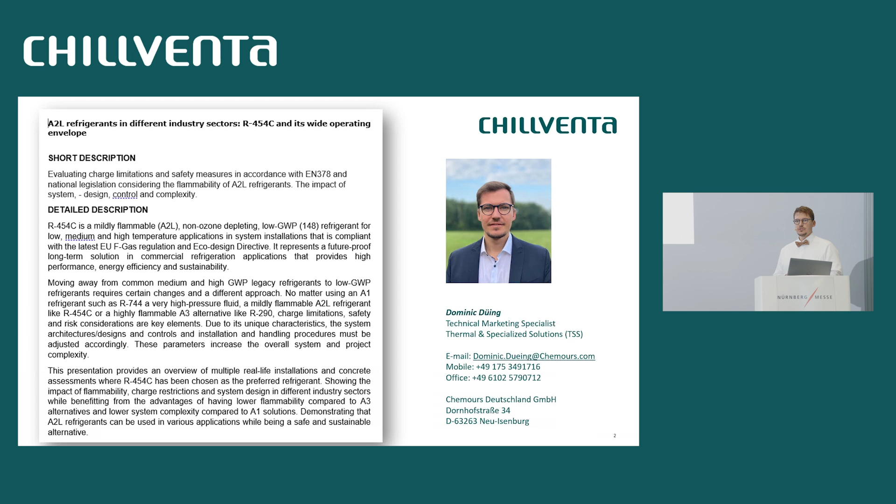Next will be an overview about low GWP solutions dedicated to the limits placed into the F-gas regulation, and then I'll have some technical comparison based on some RefProp calculations, and then we'll show you some real life case studies, implementation of systems into different applications and in different sectors. Then we'll have a small conclusion and an outlook about higher efficiency of the refrigerant 454C and how we as Chemours can support you in achieving that.

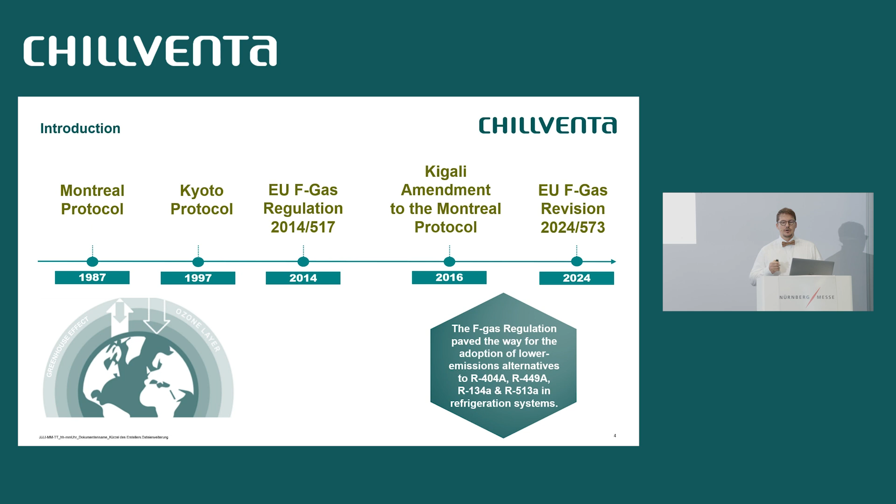So I don't want to go too much into details here. I think all of us will roughly know the path of the last, let's say, 50 years. So currently we're in 2024. In March the new F-gas regulation came into place, and with that we have new limitations and considerable bans for some refrigerants. And here's the, let's say, broad overview.

So for different sectors, starting with air conditioning and heat pump, there's the GWP limits, which you see on top of it. So we have 150 GWP limit for air conditioning and heat pump applications above 12 kilowatt. And here you can see that 454C fits in there, as I will show you later. Next point is commercial refrigeration. Also here we see a GWP limit of 150. And there's another one dedicated to chillers above 12 kilowatt. There we're talking about 750 GWP limit.

And there's our solution from Chemours, R-454B. But as already mentioned, today I will focus my presentation on R-454C, dedicated to AC heat pump and also refrigeration applications.

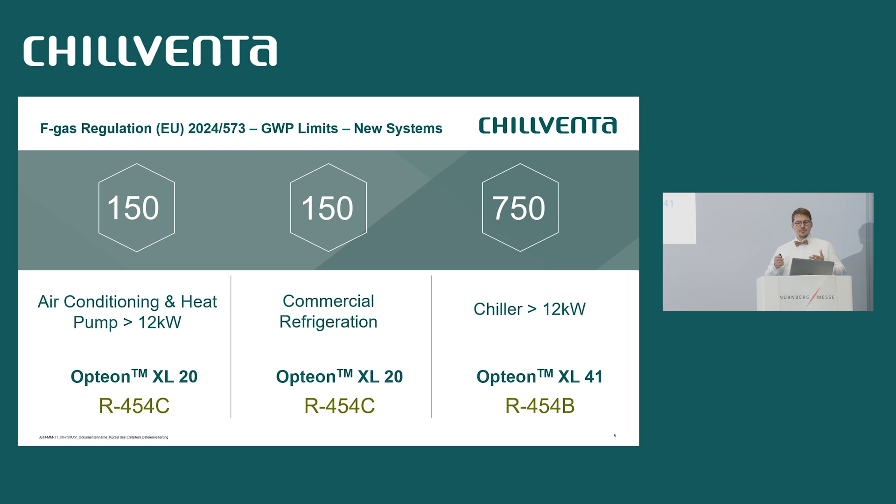So, considering the GWP limitations, I've made a small overview of refrigerants which have been used very often in the industry, especially in commercial refrigeration in that case. So on top, we have 454C. It's an A2L refrigerant. We have propane as an A3, so a hydrocarbon, and we have CO2, R744. Very important here, and the pointer doesn't work anyway.

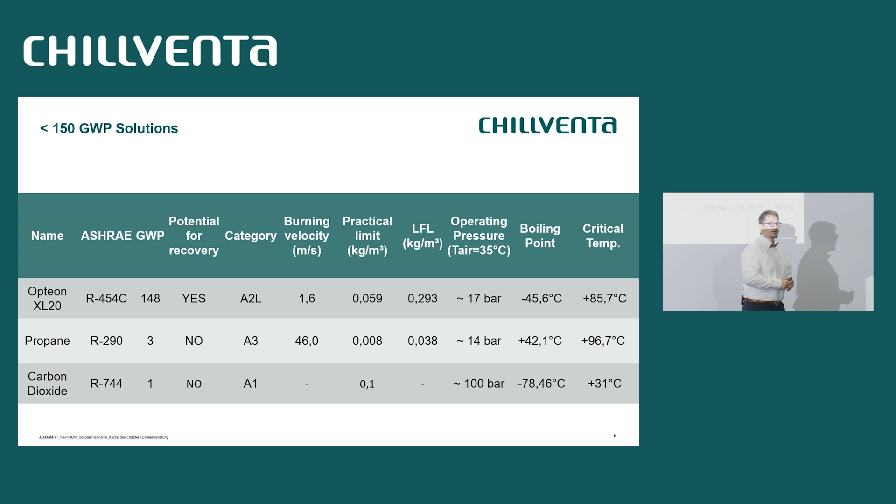So the potential for recovery. It's a big topic also for us, for Chemours, with the F-gas regulation, quota drops, etc., and also the whole circularity of equipment, refrigerant, etc., supplying the value chain. Very important, the potential for recovery for all F-gases especially, considering also other refrigerants such as 449A, 513A, whatever. So it's a very important topic.

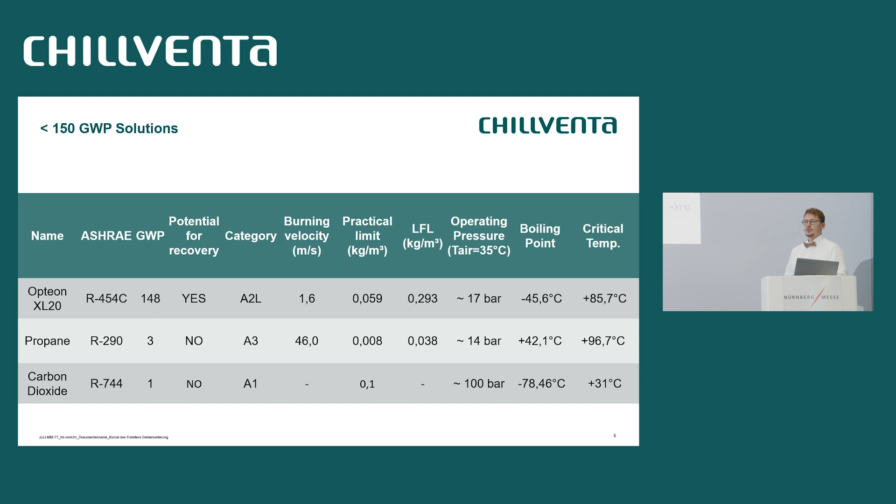Refrigerants should be recovered, recycled, reclaimed, and brought back into the system again, so that we have a circular economy at this point, supporting the whole value chain. Further right, you see some technical comparison, a little bit like practical limitation, which is obviously valid for flammable refrigerants, so in this case R-454C and propane, and some further technical information.

Next, some characteristics, and this is a very important topic nowadays if we consider the PED fluid group. So there's a difference for A1, A2L, and A3 in the PED fluid group. Considering this, when building a system, the component classification itself is important, as well as the system classification in the end. For that, we need to make sure we have the right components used in the system using A2L refrigerants, and that we have all the certifications for the components and also for the complete system. The component classification itself is also in accordance with the PED fluid group.

It's a little different for the service equipment compared to using an A1 refrigerant. With A2L, the mechanical tools are exactly the same. We just need to look a little bit at the electrical equipment, especially the service equipment, considering again the different PED fluid group, flammable refrigerant, so we need to take care of that. Same as propane, in some cases you need anti-static tools to make sure you're on the safe side when handling those tools and the refrigerant.

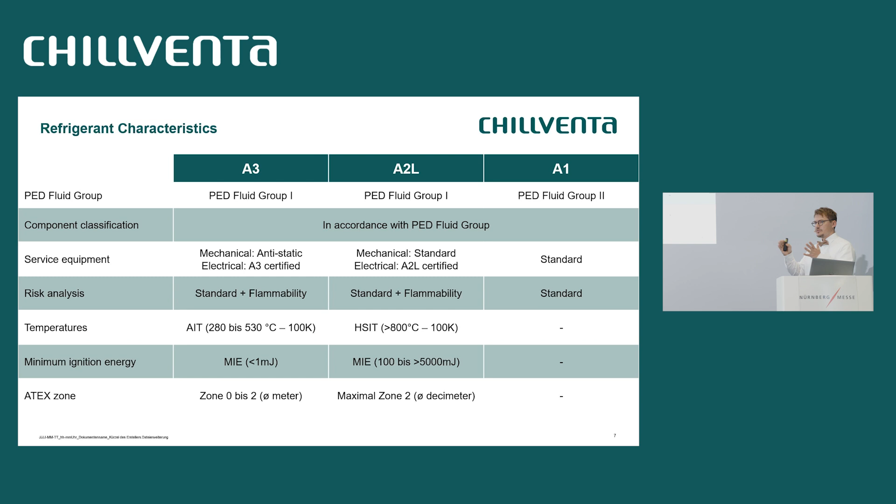Considering the refrigerants' flammability, pressures, etc., we have different regulations in Europe, but all over the world as well, of course. For example, in Europe we have the EN 378, and kind of the counterpart on the international level is the ISO 5149, and we have the 2-89 for cabinets, for example, and the 2-40 for heat pumps.

I already mentioned it, but there is the risk from the refrigerant itself, and it has to be considered. No matter what the refrigerant is, we have to make a risk assessment, which is part of the risk analysis. So the first step is to analyze the risk of the overall system, and then we have to evaluate the risk, and overall this is called the risk assessment.

And obviously safety. We have different kinds of refrigerants. Now with A2Ls, we have the flammability. Is it an issue? Well, this also depends. There are things we can do for it. We can support customers. In the regulations, we find the right way of doing it. They guide us through what we have to do to make the system, but also the surroundings, the whole area where the system is installed, safe.

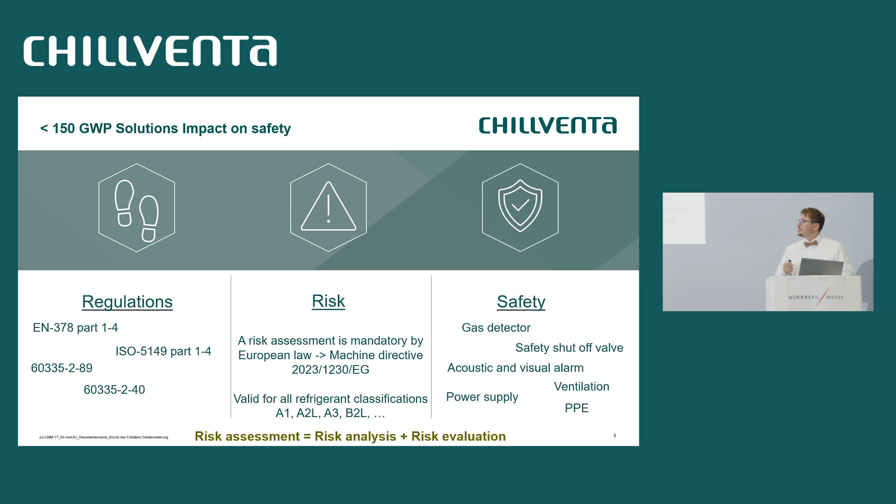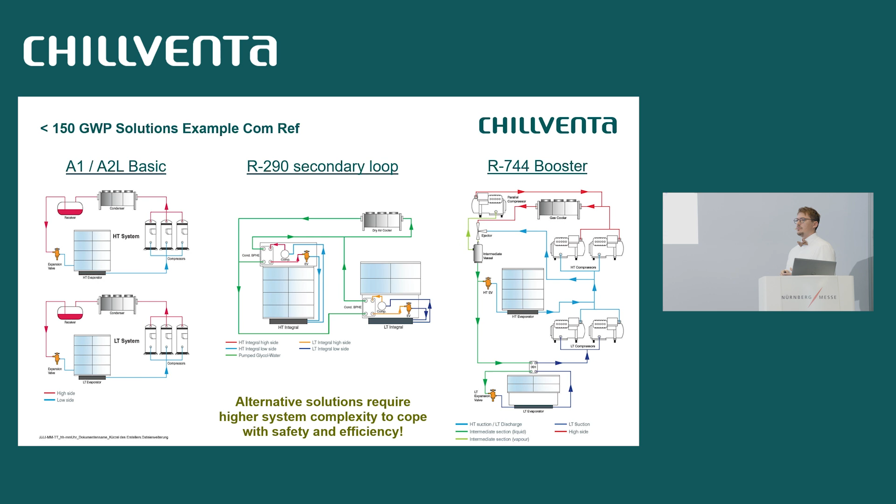While using an A1 or A2L refrigerant, it's a very similar, very simplified system. But even here, and this is something I will show you in the end, there are ways to further improve the efficiency of F-gas systems.

So this is just an example. It's theoretical information based on RefProp 10, as mentioned there, just to compare some legacy refrigerants with new A2L refrigerants such as R-454C, and we definitely see there's a way lower GWP compared to other refrigerants or solutions which were used very much in the past and which still are.

Yeah? Okay. Sorry. So you can hear me again.

Again, this is theoretical, based on the RefProp database. This is the upper left corner. You see that it's for low temperature applications. See two or three refrigerants, and what we see here is that the efficiency is very similar, but there's a little capacity loss when using R-454C. But even here, we have a solution to cope with that. So in order to deal with possible charge limitations and safety, there are ways of improving the capacity as well as the efficiency of A2L systems.

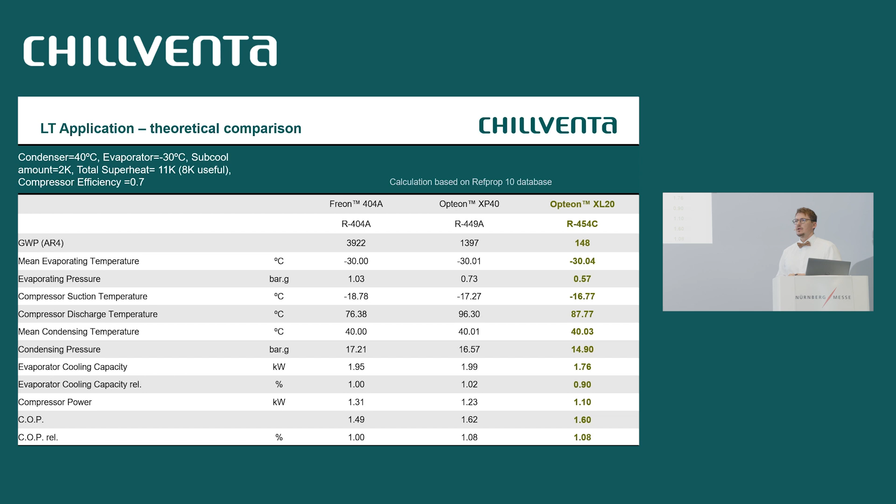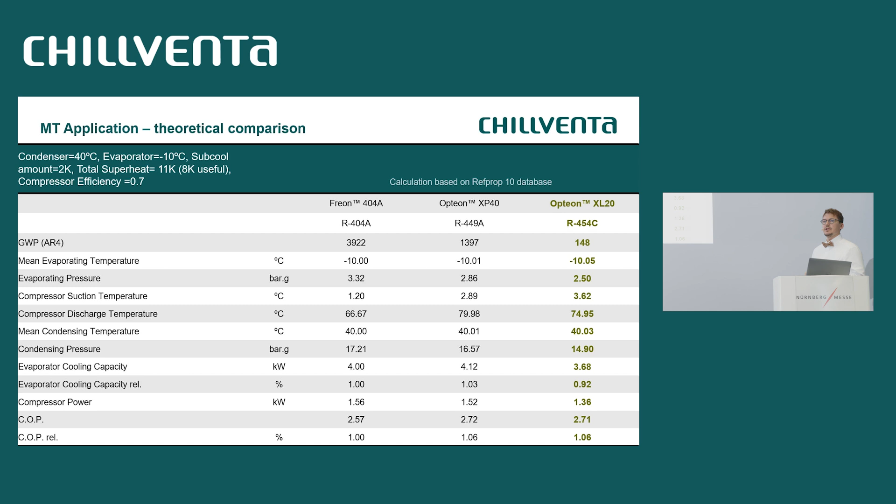So this is another example for medium temperature. I just added those data to show you, because I think the presentations will be available afterwards. So I will not go into any depth here. It's just for you to see the thermodynamics of 454C compared to the other refrigerants mainly used in each application: low temp, medium temp, and high temp.

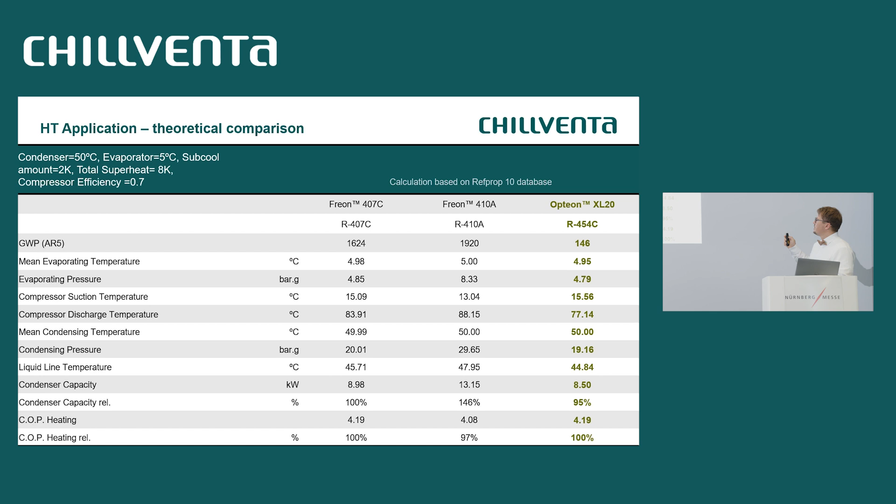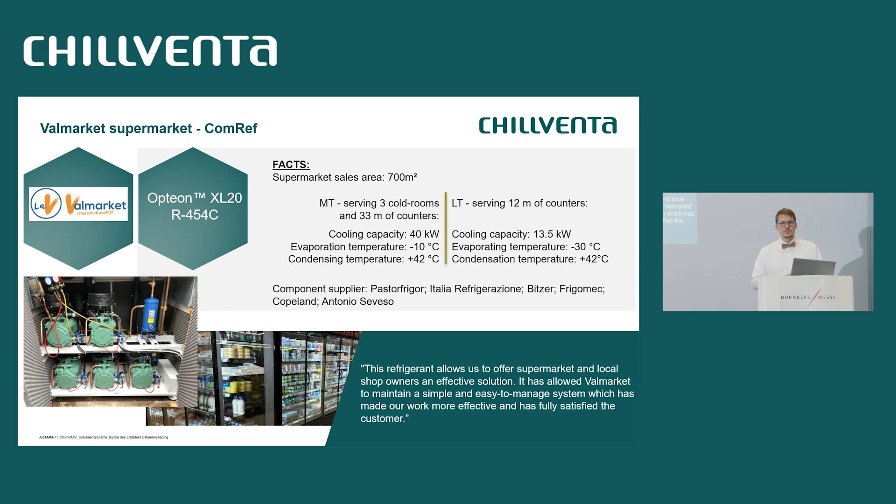So starting with that, I've collected a few case studies which I would like to show you. In each case study, 454C is used, and they're all in different industry sectors and different applications. Starting with that, there's one market case study using 454C. It's a supermarket with a sales area of roughly 700 square meters, and it's been used for medium temperature as well as low temperature in that case. So one refrigerant dealing with both application ranges, and we got pretty positive feedback from the customer as well as the end user, and this is something they would like to consider further. And the very simplified system was very much praised, and they were interested in considering those further.

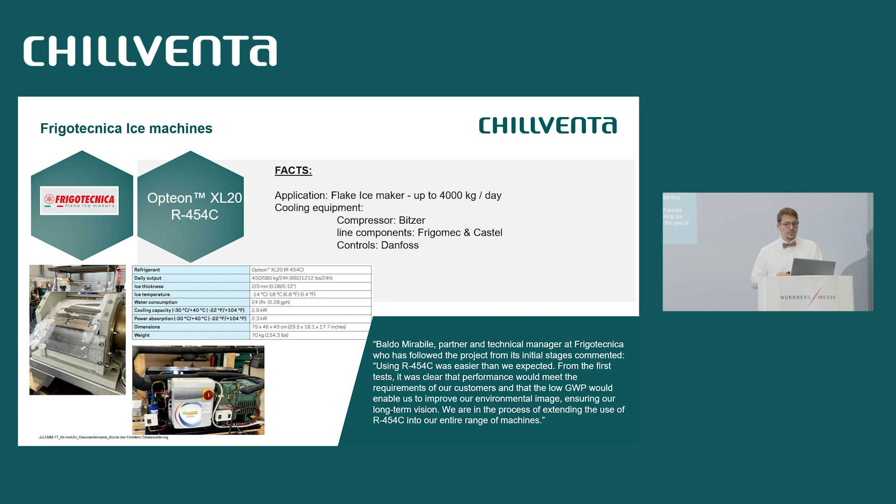We have another case study from Frigotecnica for ice making machines. Again, a different application, much smaller system. They're making roughly 4,000 kilograms of ice per day, and it's very important, especially for ice, because if you cool it too fast or too slow, the ice gets a bad shape, it's getting white, and this is what they would like to avoid. So they've made many tests using 454C, coming from 404A in that case, comparing those, and are building all of that now with 454C, also for larger machines like this.

There's a third case study here, using condensing units. Here we used Bitzer Ecolite condensing units. It's a freezer, so low temp again, using 11 kilograms per system. This was done obviously for safety reasons, but also to make sure we have a certain redundancy of the system. So if one system fails, there's another system picking up and keeping the whole system running, making sure the client, the end user, is always on the safe side.

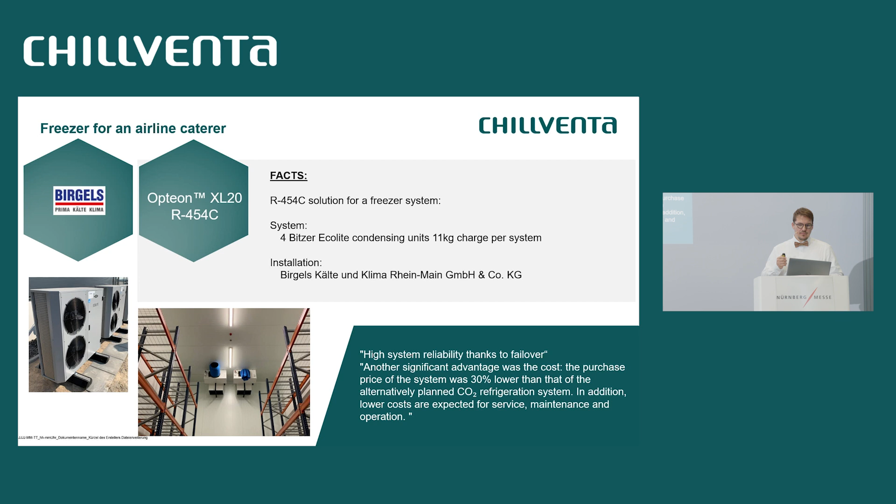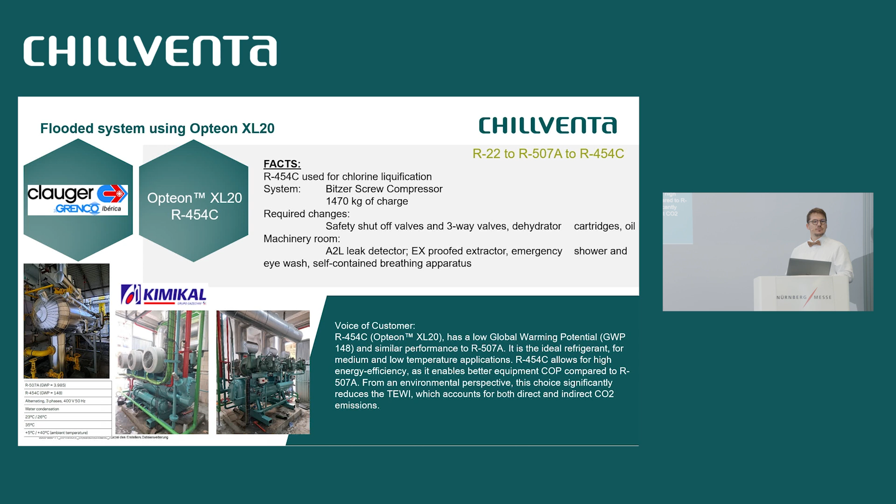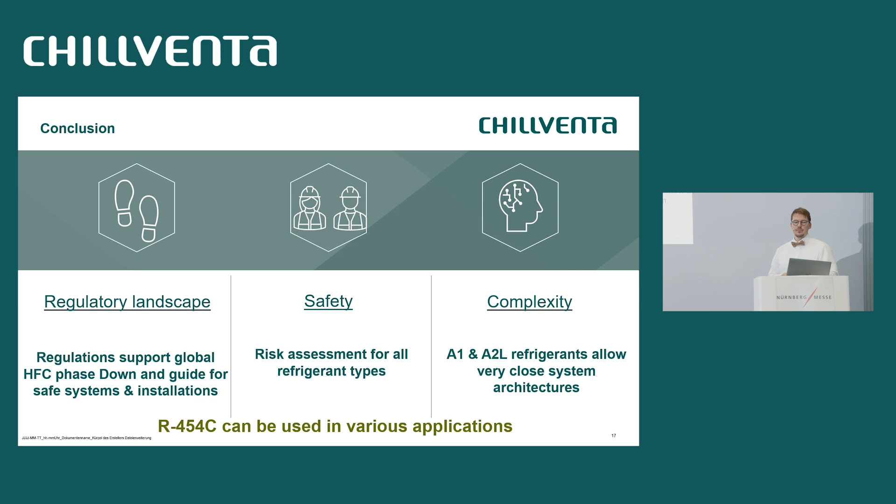I think I have not much time left, so I will move on. So in conclusion, the regulatory landscape: there are incentives and regulations in place, such as the F-gas regulation. They decrease the GWP limits as well, banning some refrigerants. This is in place, especially in Europe. There are solutions available which can be used with low GWP, and on the other side, safety. There are other regulations taking care of safety, such as EN 378, for example, and the system complexity. One of the big advantages of A2L refrigerants is the lower complexity of each system used.

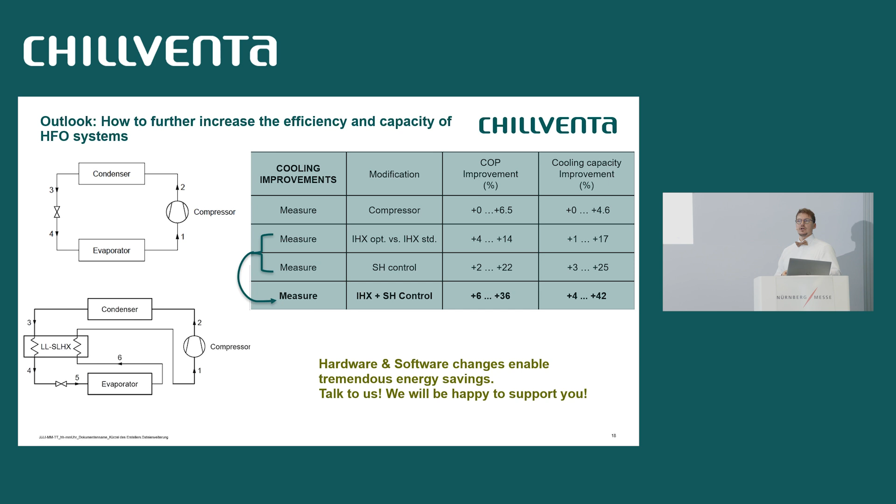But there are ways of improving it, making the system more efficient, but also a little more complex. What you see here is an example; there are not too many details on purpose, which cannot be shared like this. If you're interested in looking into this, I think the numbers are very impressive. COP improvement, comparing the same refrigerant with different measures on the system, regulation, and component-wise, we can increase the efficiency by up to 36%. And the cooling capacity: using 454C, you will have less cooling capacity compared to 449A, for example. But there's a way of improving it by up to 42%. So we cannot just cope with it, we can also increase it by far, which is very important considering safety and charge limitations.